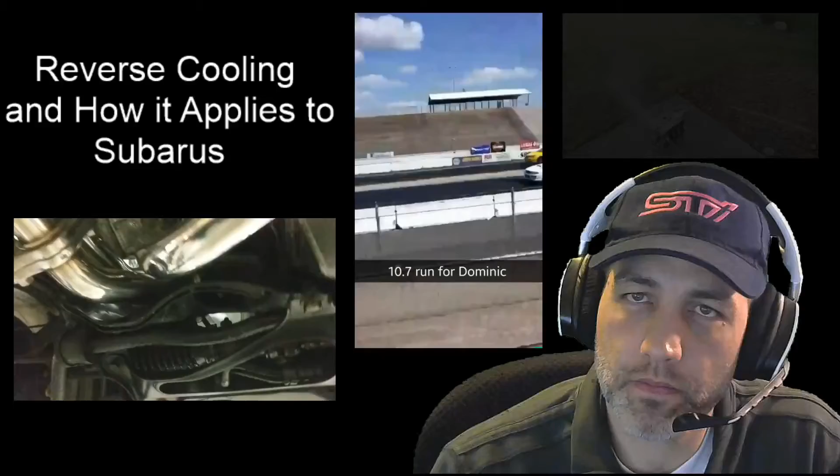This one is going to be a little more advanced in concept, not in mathematics, but in concept. I want to talk about cooling systems, more specifically what we're doing with a cooling system in a car, and what is reversed cooling.

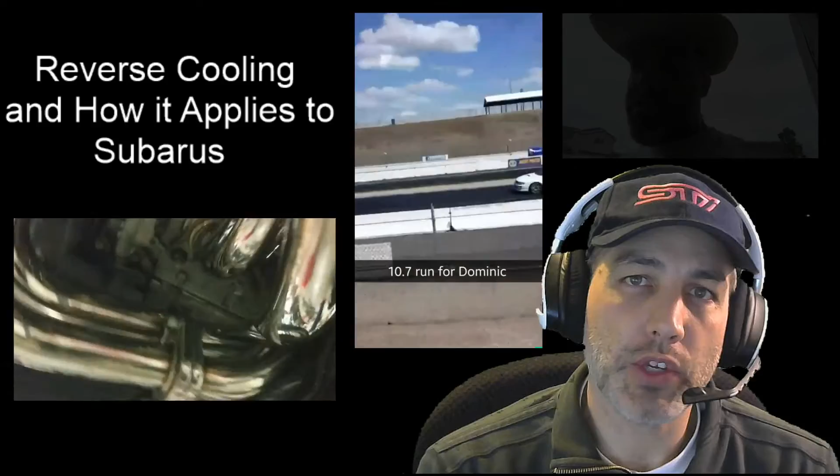Some of us are old enough to remember the small block Chevy and how it was the staple, or still technically could be called the staple, of classic car high performance. It's the universal power plant that a lot of people put in everything. It's a decent platform, you can do a lot with it, but it has a lot of limitations.

After the small block Chevy came the LT1 series. They had realized and learned some things, and they were able to make some significant gains in power density and ease of making power on it. But it didn't really get as popular, I think, as it probably deserved to be, due to the complexities of the fuel injection systems that also came out at the same time with the LT1.

The 80s and 90s, late 80s, early 90s, was when electronic fuel injection was really starting to take off. However, it was really complicated, due to limitations in the solid state circuitry, solenoids, actuators, and that kind of thing. A lot of stuff was done with vacuum lines and diaphragms, so these cars had just nests of hoses under the bonnet, hose after hose after hose, and lots of extraneous systems to try and tackle certain tasks.

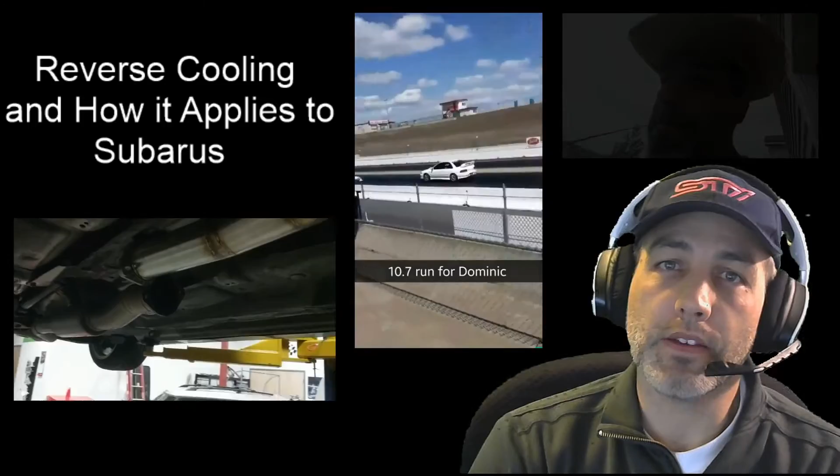Whereas now, modern fuel injection, especially on the Subaru, is quite simple. There's not nearly as many hoses. There's some wires, but overall the systems are very streamlined and efficient at operating.

Later on came the LS, and they did some more stuff. Theory is they copied some Ford parts, the head design and things like that, is something I hear a lot of. But overall, the LS makes way more power than a small block Chevy does, and it gains more power for the same modification than a small block Chevy would. But it really all started with the LT.

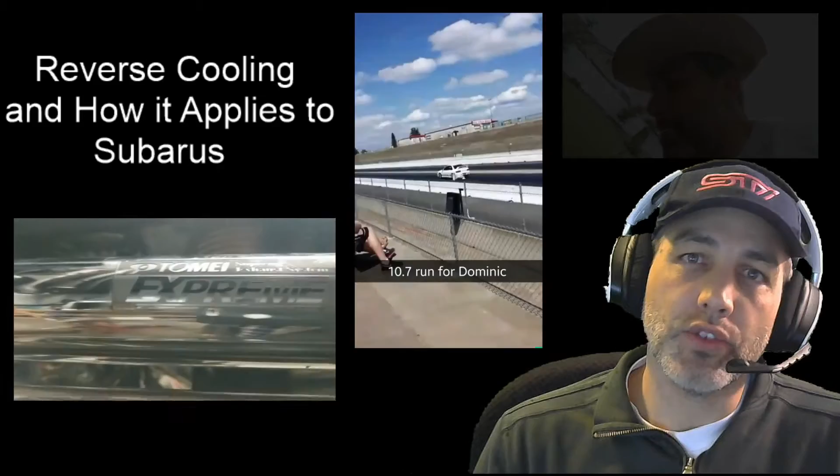So what was one of those things that they figured out? One of those is cooling, known as reverse cooling. I don't know why they call it reverse, but I know they call it reverse. They call it reverse because originally the cooling systems would pump water into the cylinder block to pull heat from the cylinders, and then the coolant would flow up through the head and get distributed there. That was conventional cooling.

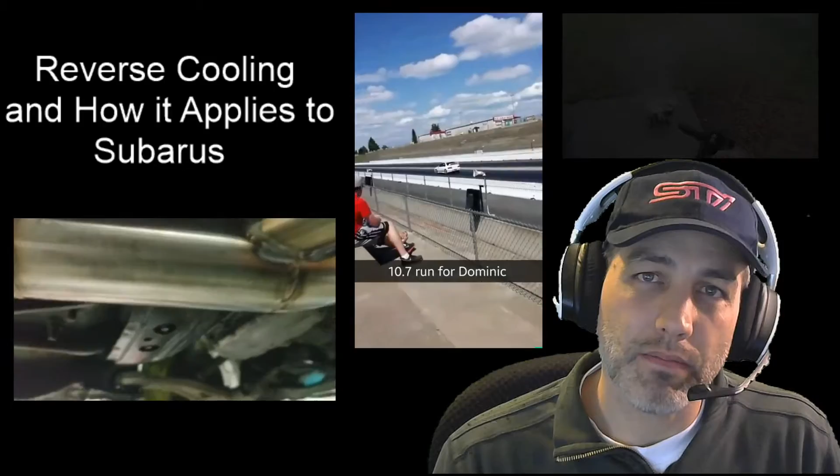When they realized, if we cool the heads first and keep them cooler, then we can get more power, we can run higher compression ratios, we have less knock tendencies, all this stuff happens that's really advantageous for us. So they called it reverse cooling, because now it was going from the heads to the block. So why did that work? What about that worked? I'm going to share with you a few things that talk about how that works and why that works.

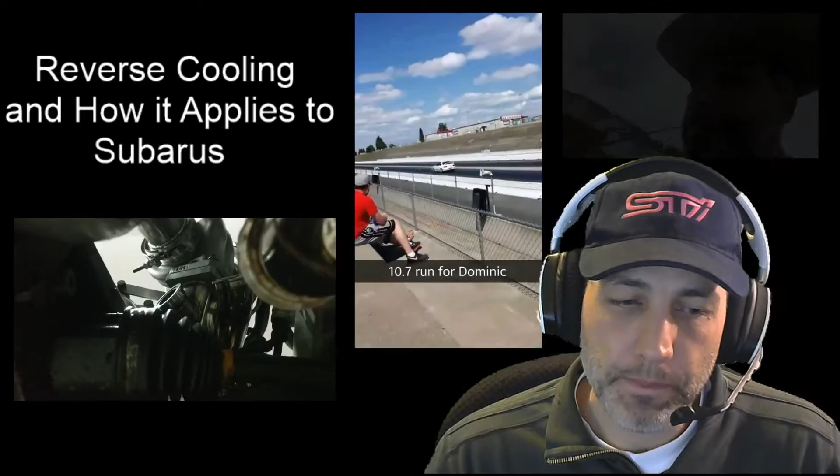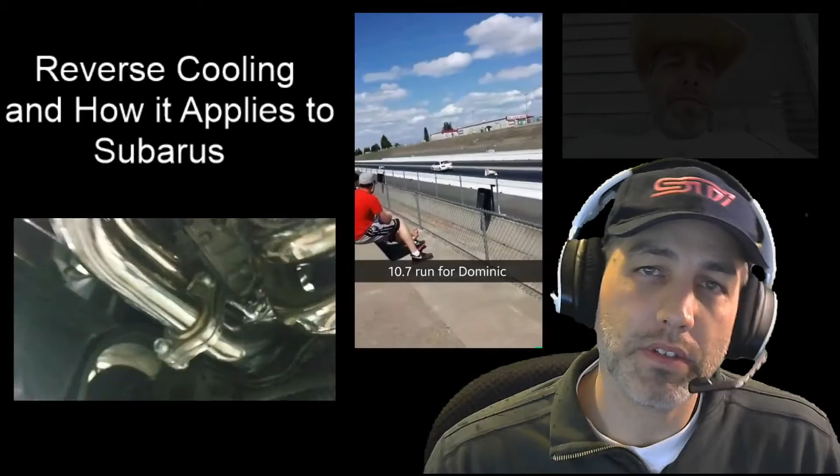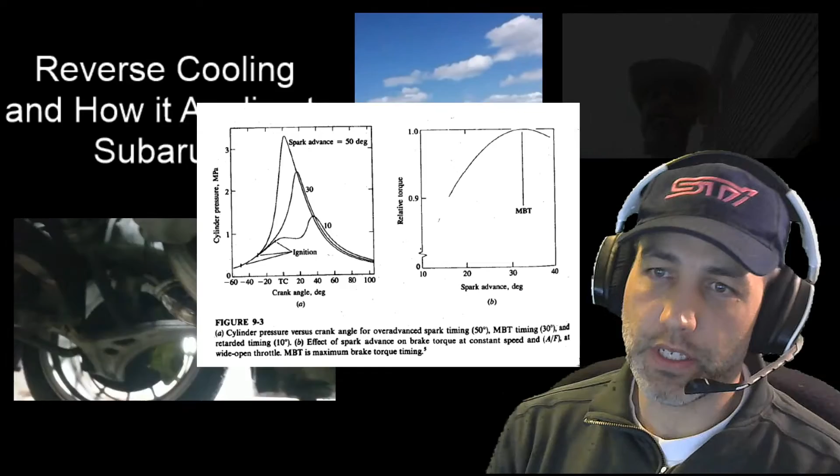If you look at that graph I posted, a 50-degree advance has peak pressure at top dead center, and that's actually bad in that situation. That's too much pressure at the top, and you're not gaining anything by doing so. At the 30-degree mark, that is the correct ignition advance for this engine, and you'll see that the cylinder pressure peaks around 20 degrees after top dead center. You'll also notice the 50 degree has more peak pressure, but if you look at the graph to the right, you'll see that the torque actually does not go up with that.

It's just you're wasting energy and you're adding heat, and heat is the thing that we're really concerned about at this point, right? We're talking about pulling heat out of the engine. So how much heat is there in the engine, and where is it concentrated the most? Well, it's concentrated the most in the combustion chamber.

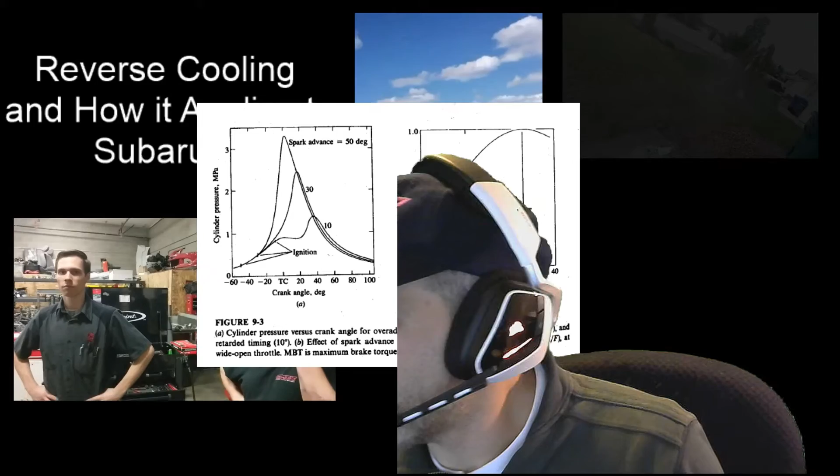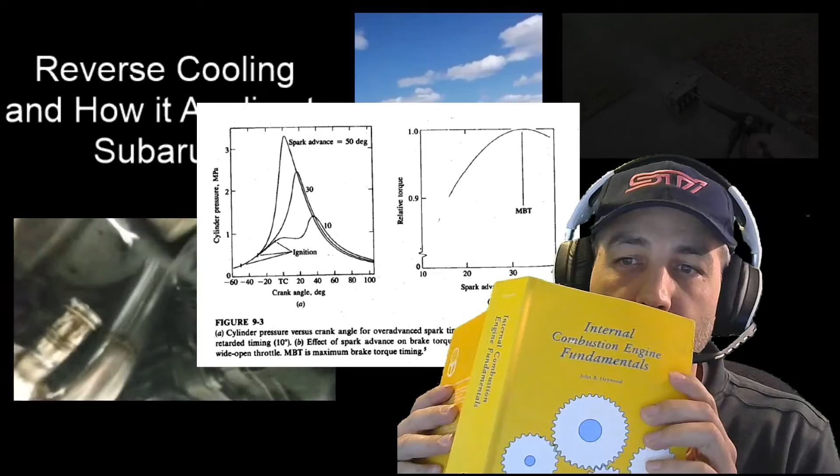I don't have modern equipment to prove that to you, but I do have some entries out of this book here, Internal Combustion Engine Fundamentals by John B. Heywood. And I have this graph here, and reading this and putting that graph together, we can figure out together where all the heat is.

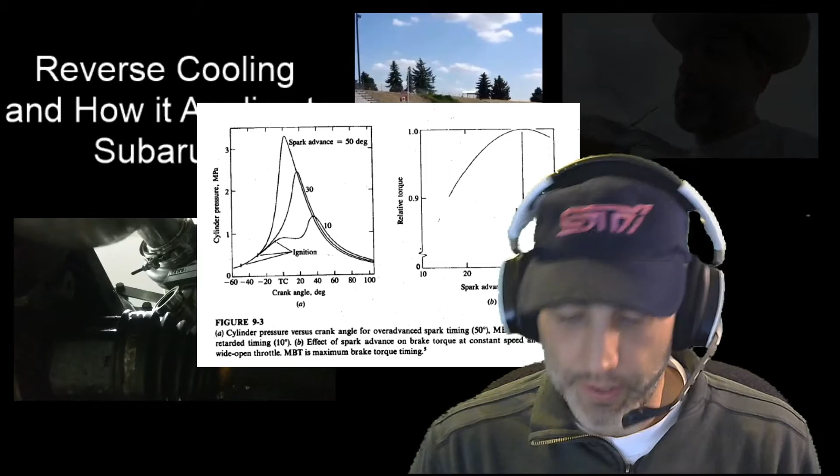This section is actually about combustion chamber temperature. It says that the surface area of the combustion chamber varies through the cycle. The heat flux into the containing walls changes continuously.

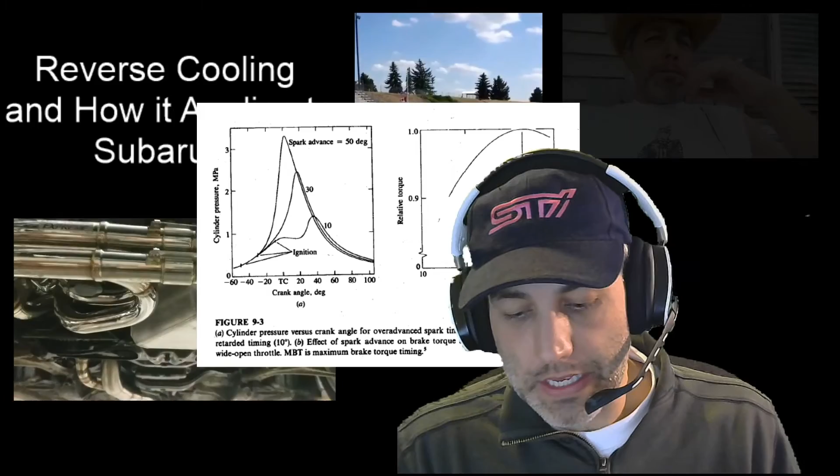From a small negative value during the intake process. So what they're saying here is they're calling, in this case, the combustion chamber's entire volume at this point is what they're calling it. So during the intake process, the piston is moving downward, and so the heat flux is actually reversed. It's actually cooling at this point, which is expected, right? You expect that when the intake air comes in, it's going to cool whatever's in there.

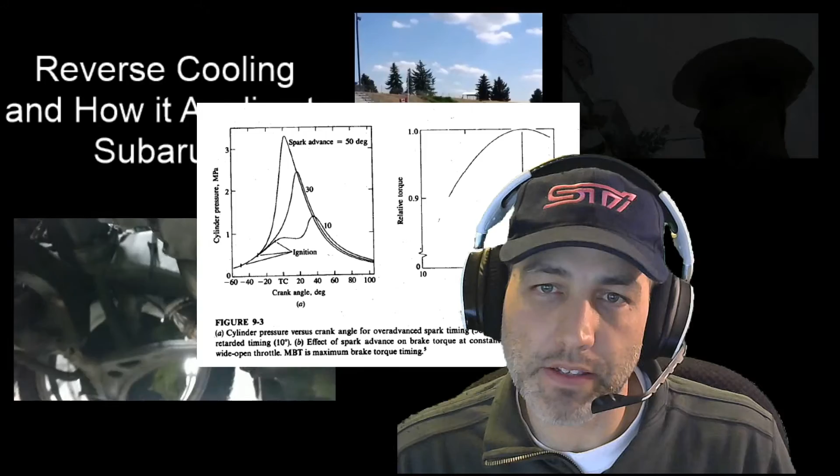So it says the heat flux into the containing walls change from a small negative value during the intake process to a positive value of order several megawatts per square meter early in the expansion process. Well, if we look at our graph, we can see where early in the expansion process is, knowing that our ignition event is at 30, and we can see that expansion starts to move up after that.

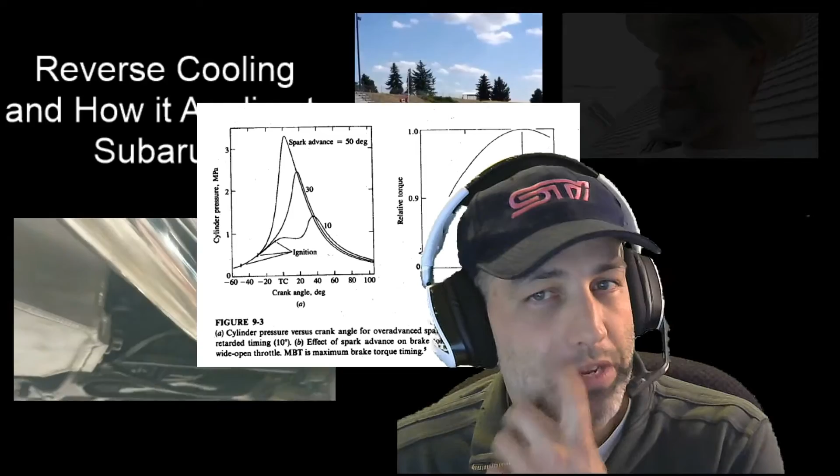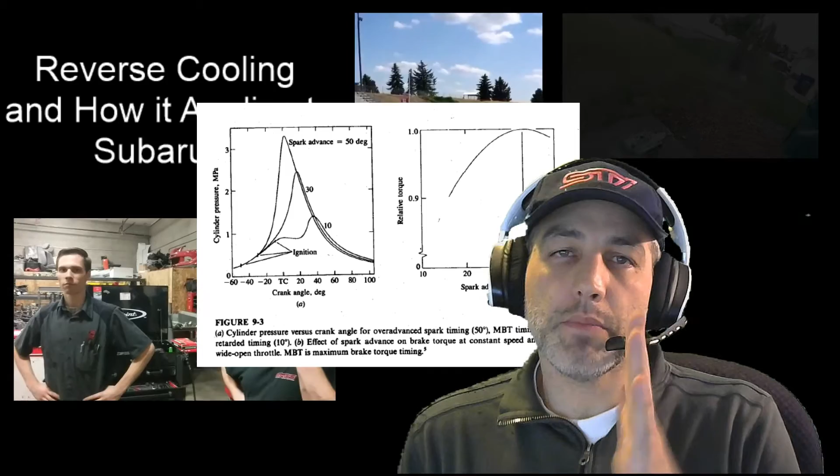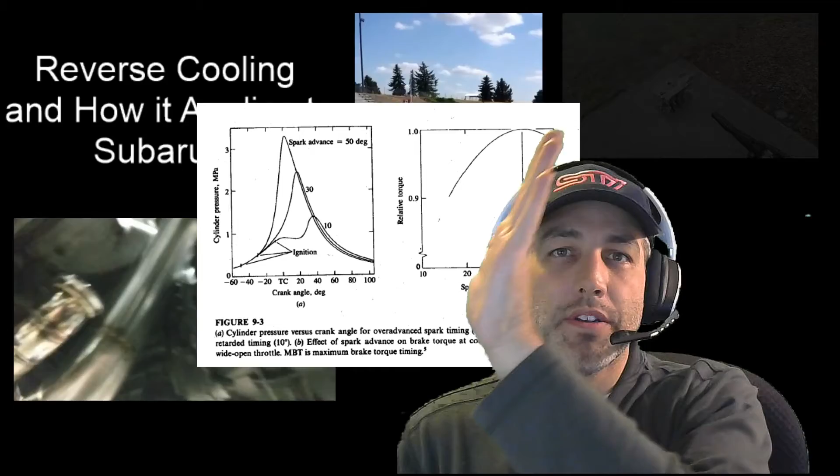Now, how early is it? I don't know how early they're talking, but if you were to look at the piston location at 30 degrees before top dead center versus 20 after, the piston does not move much. As the piston is approaching top dead center and the rod swings over the top, right, there's a lot of degrees of crankshaft rotation with hardly any movement at the top of the rod, which means the piston is hardly getting much closer.

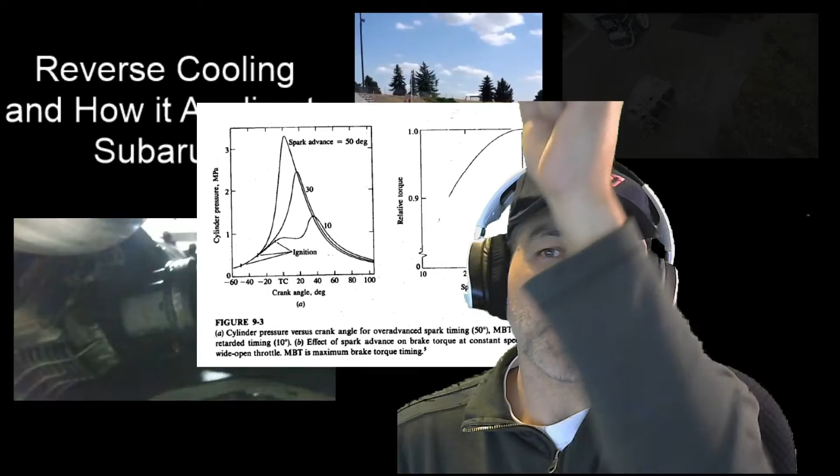So the piston goes really fast through 90 degrees, and then it slows down, it goes through top dead center, and then it comes back down again. I'm going out of screen on my camera there, sorry about that, but I think you can get the idea.

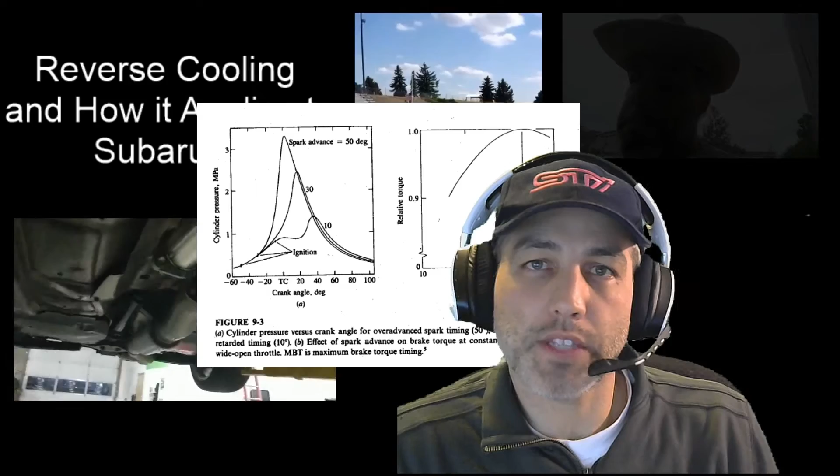So what that's telling us is that the majority of the heat, or at least the highest rate of heat transfer into the engine during the combustion process, is early, and that means that's when the piston's at the top. So where is the majority of the heat going to be? Well, it's going to be when the piston's at the top. Most of the combustion happens when the piston is at the top. Most of the energy formed happens when the piston is near the top. So anywhere from 20 before to 20 after, we'll just generalize that in this case. Well, it's all at the top.

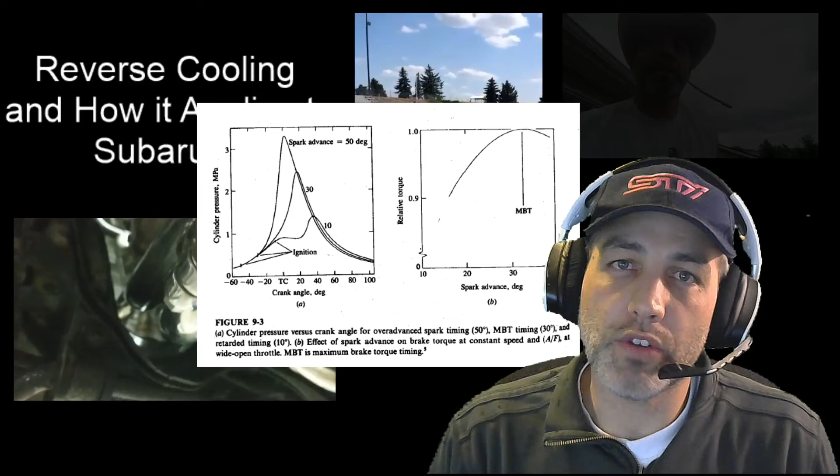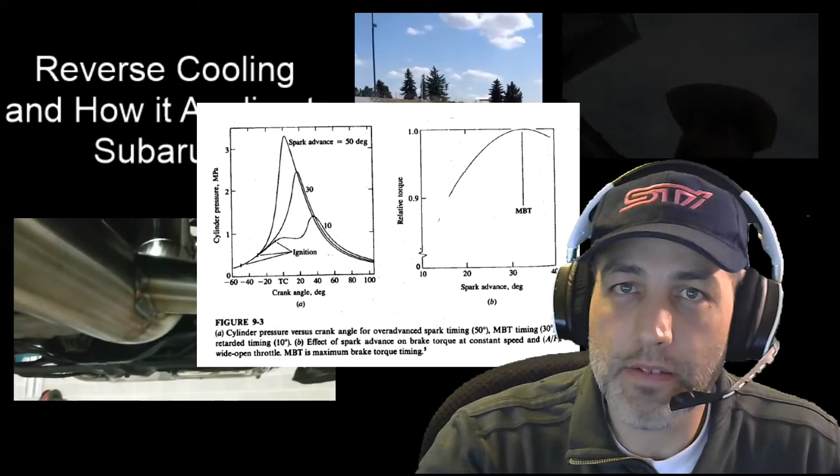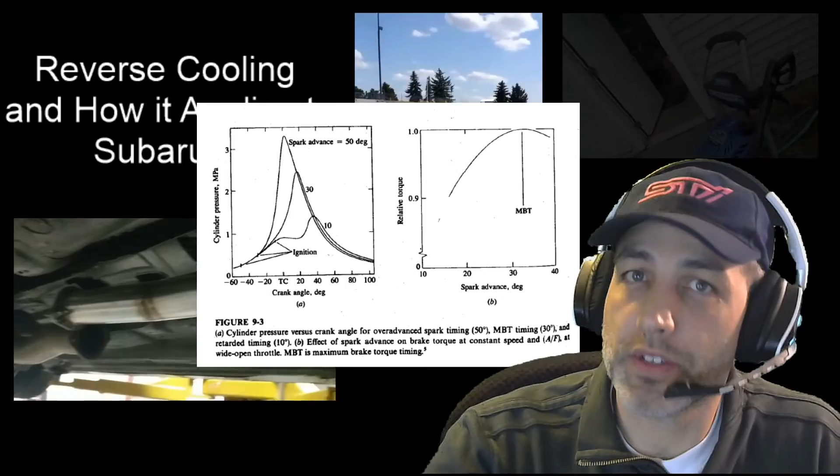So what does that mean? That means that if we need to remove the heat from the head, put some priority on that, then we can reduce combustion chamber temperatures, and we can reduce our knock tendencies and things like that. Now, why am I bringing that up? Well, I'm bringing that up because the EJ has a tendency to break the number 4 piston. Some of that is by design from Subaru as far as the programming is concerned, and some of that is just because of the mechanical system itself.

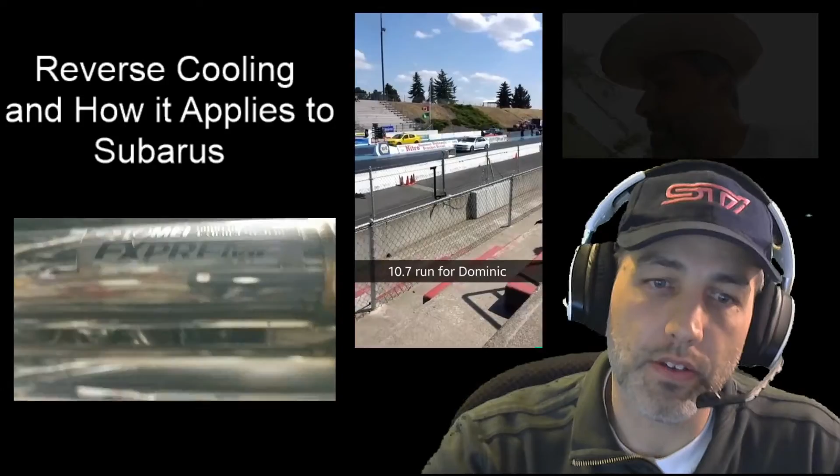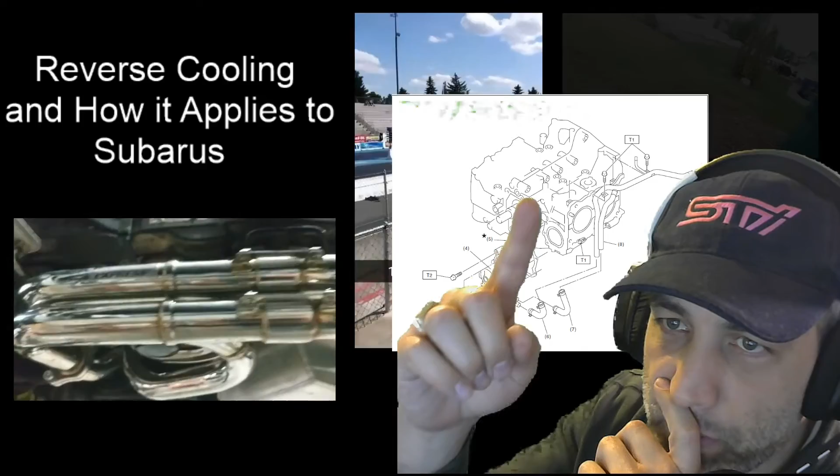So in the EJ, the knock sensor is really close to cylinder 4, but it's in that picture. Well, it's not in that picture, but next to bolt T1 there. Let's see if I can point to it. Right, that little bung area, that's where the knock sensor sits, okay? Cylinder 4 is right there, cylinder 2 is right there. So the knock sensor sits really close to cylinder 4. That means the knock sensor hears cylinder 4 better than anything else.

Cylinder 3, cylinder 2, and cylinder 1 are really far from that sensor. Not only are they far, but the block is split, with silicone between the two halves. How well does sound transfer through a solid material? Pretty well, it conducts very well. But if you split that material and put it together, you lose some of that transfer, a significant amount. Then add silicone between those two halves, and you're going to hear a lot less. Are you still going to carry sound? Sure, you're absolutely going to hear it.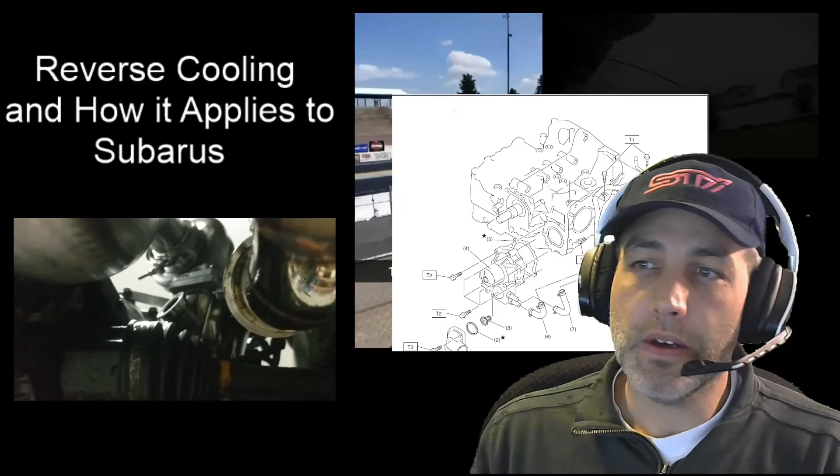In addition, the valve train for cylinder 4 is really close to that sensor, closer than the combustion in cylinder 3, and especially closer than the combustion in cylinders 1 and 2. When you're listening for a knock event, which usually happens around 20 degrees after top dead center, near peak pressure, you're also having valve events happen on other cylinders. If you look at some cam profiles, some cams don't close the exhaust valve until 20 degrees after or so. And if you have exhaust AVCS and you retard the exhaust cam, you push the closing point past top dead center, so you end up with valve events at the same time you could be having knock events.

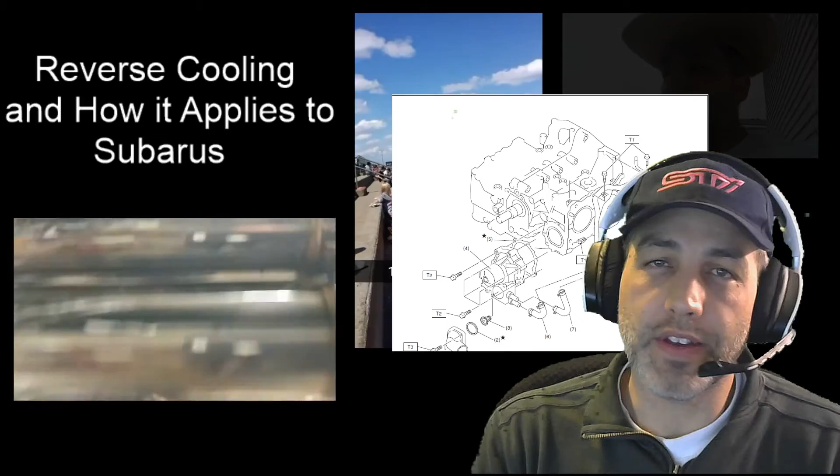Subaru realized they were having issues hearing all 4 cylinders and not being able to filter out the valve events from other cylinders, since those noises are closer to the sensor than the combustion in the other chambers. In the FA engine, you can see they addressed it by adding a second knock sensor, one on each case half, placing them closer to the cylinders than to the heads. So they addressed that issue with that.

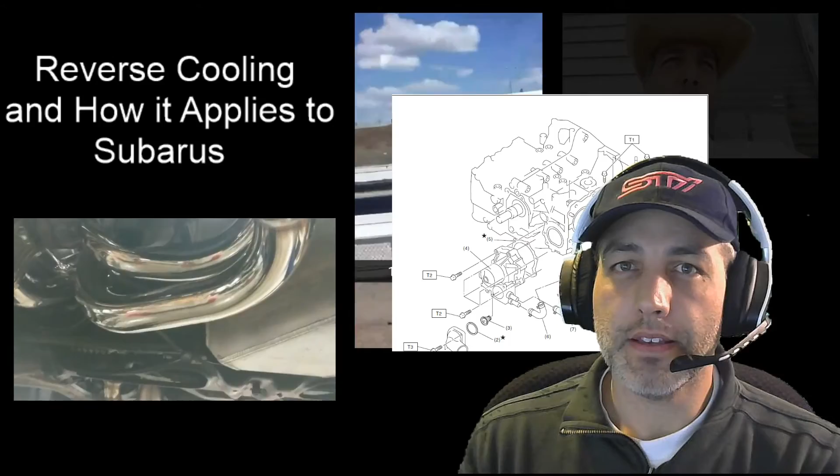So what did they do with the EJ though? They still stuck us with one sensor, never added a second one. Instead, they said, okay, we can hear cylinder 4. And we know that if we make cylinder 4 the most aggressive cylinder, throwing extra timing at it and pulling fuel out of it, and keep it knock free, then the other cylinders would have to be knock free too, since they're not nearly as aggressive. That's exactly what they did. Look at any of their calibrations and you'll see cylinder 4 has more timing, or the others have less, based on what's positive in cylinder 4 versus negative in 1, 3, and 2. The fueling is similar too, typically cylinder 4 has less fuel as well.

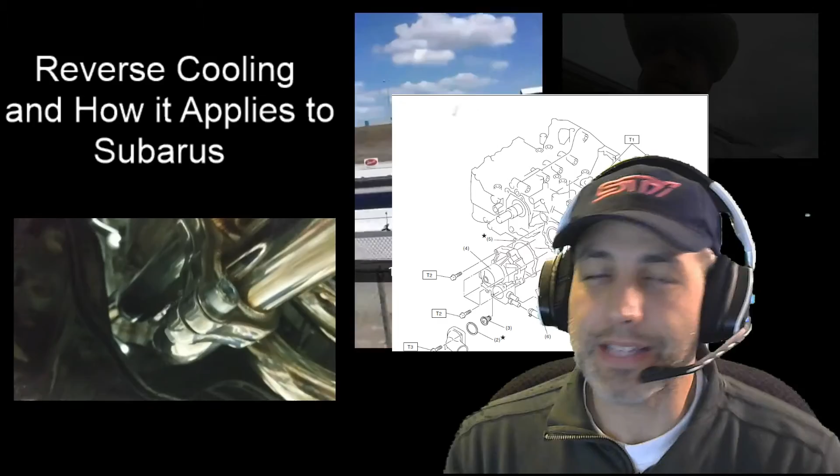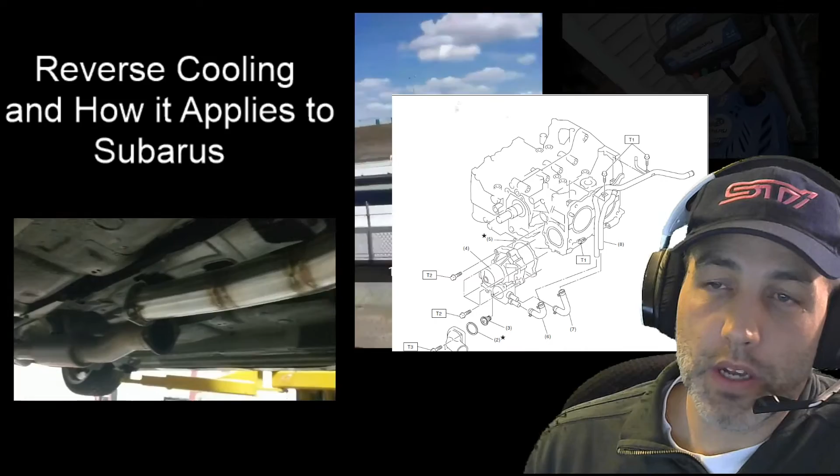There's another thing that occurred to me when I was taking the engine apart: cylinder 4 also has less cooling, the head has less cooling. If you look at the picture behind me, you'll see the water pump bolts to the front of the block itself. It's near the head, but it bolts to the block, and it discharges water through the crossover to the side, but also through the block case itself, and then into the head.

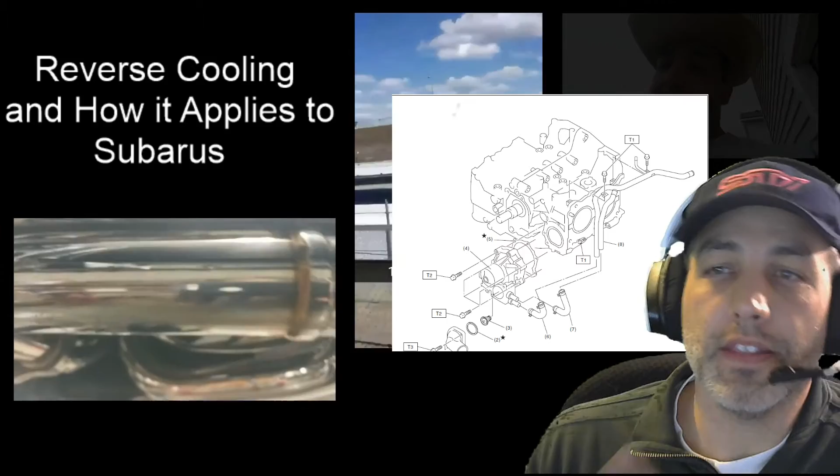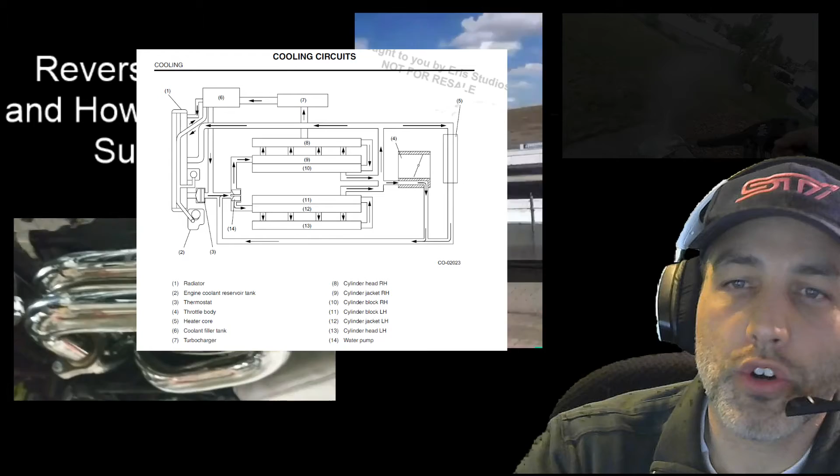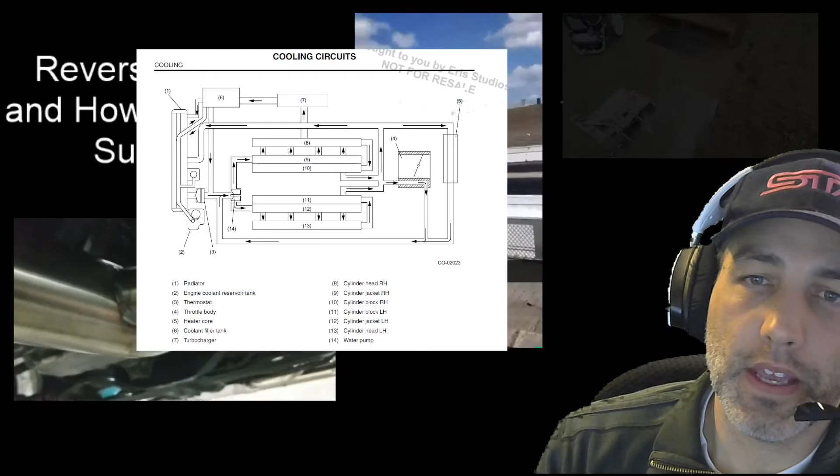Subaru shows a coolant flow path diagram, let me bring this up. Number 14 is the water pump, on the left side there. It flows into 12, which is the block, then shows 12 to 13 to the head. There are 4 ports showing the head, which are just the holes drilled in the deck of the head gasket and the head. The deck is actually mostly open on these nowadays anyway. So it moves through those ports in the head, and then shows this little crossover tube over there.

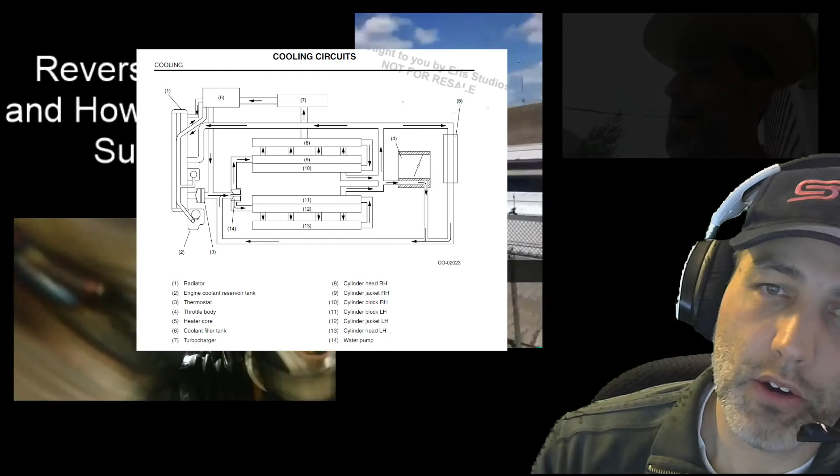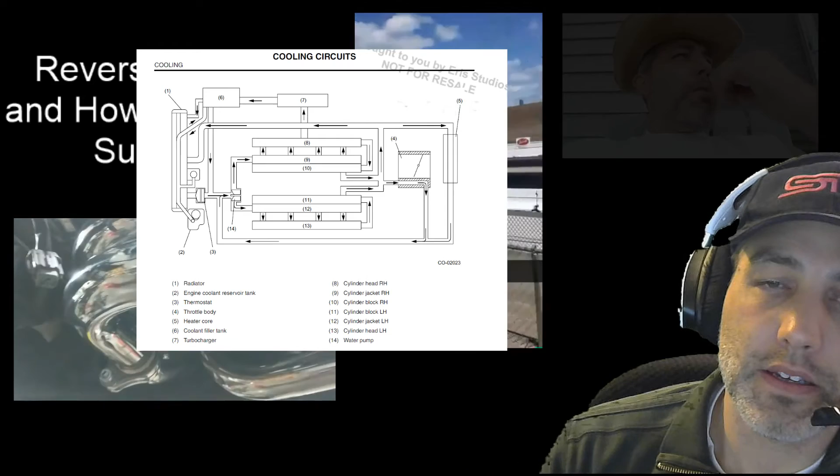Well, there really isn't a crossover tube. If you look at the cooling system on this thing, there really isn't a crossover tube, and it shows this little flow path here. It's a little weak, and the flow path kind of bypasses the exhaust side of cylinder 4. And if you look at a cylinder 4 piston that has failed from knock, you see that almost every time the part that breaks is the exhaust side of the piston on cylinder 4.

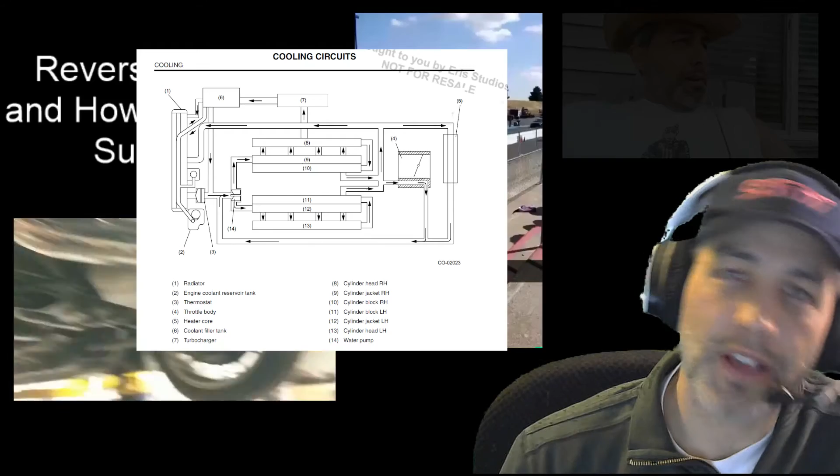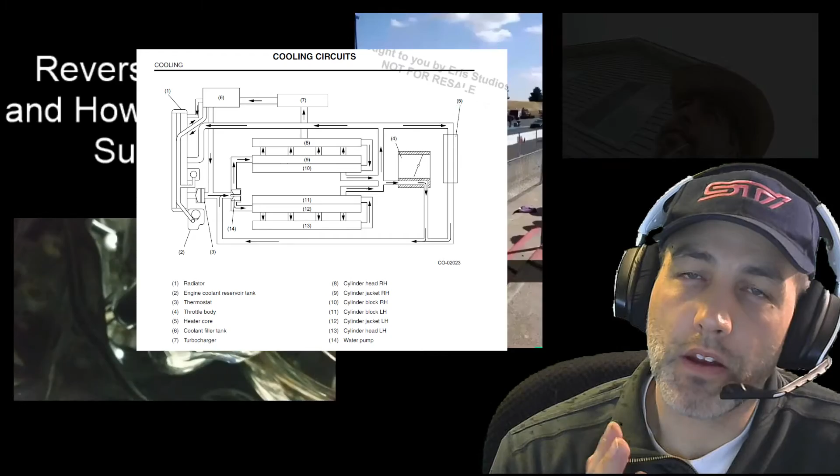So when I look at this, I say, it seems to me that not only is cylinder 4 the most aggressive in tuning, but it's also most aggressive in lack of cooling.

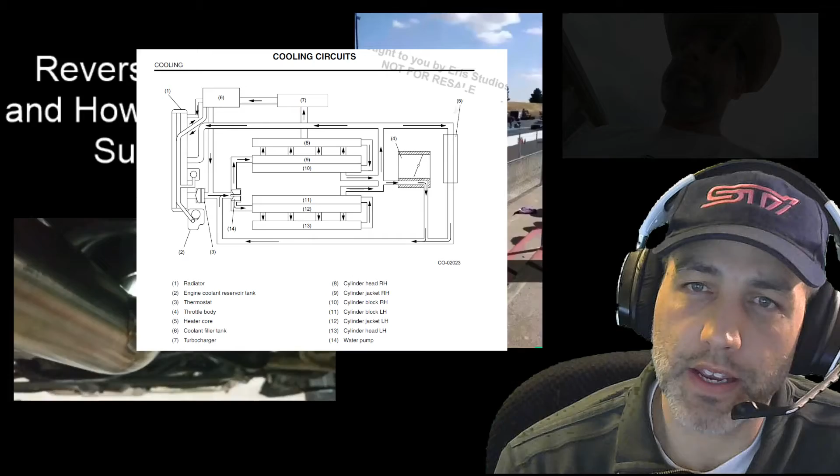If you look at that picture some more, you'll see the passenger side head, or right-hand side head. It goes from number 9, which is the block, to 8, which is the head, and then to 7, which is the turbo. And the turbo is fed out of the head. Then it goes through the turbo, the reservoir, and back to the inlet of the pump again. So the passenger side head has a flow path that promotes flow through the head to the end of the water pump. But cylinder 4 doesn't have that.

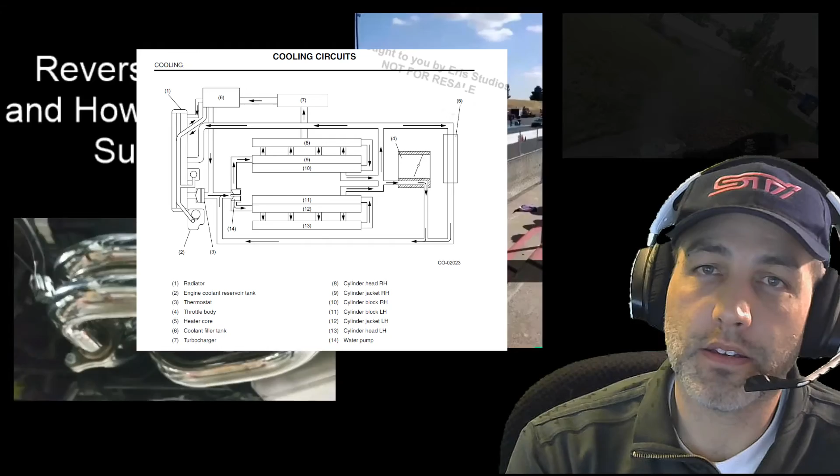Now the twin turbo Subarus do. They have a coolant line that comes out of the head and feeds the turbo, and then goes to the crossover tank and that kind of stuff. So there's a forced flow path on the driver's side head, and that helps to aid in cooling.

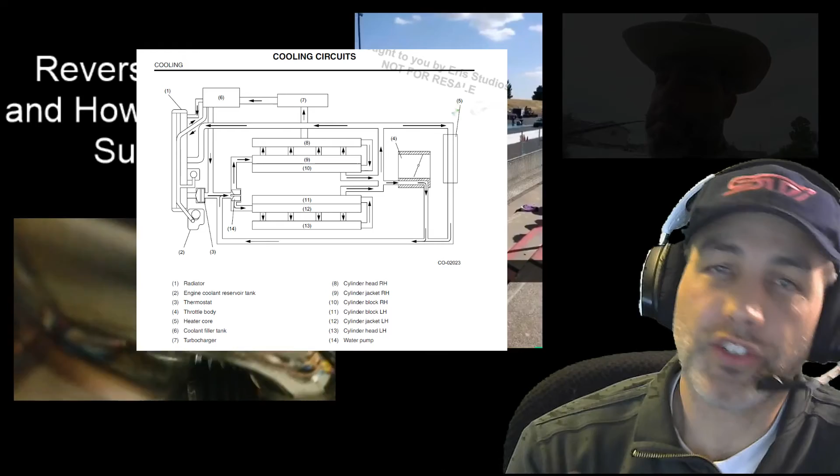So my newest product that I have produced is addressing that exact issue. My goal is to increase the flow around cylinder 4, the passenger side, the driver's side head, and by doing so, make it not so aggressive on cooling. I want to bring it down. I want to reduce the knock tendency of cylinder 4. And if I can increase the cooling to cylinder 4, I believe that I can do that.

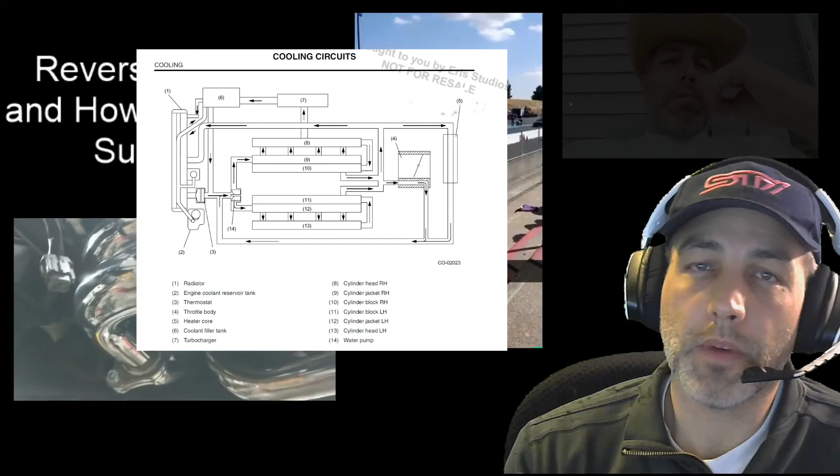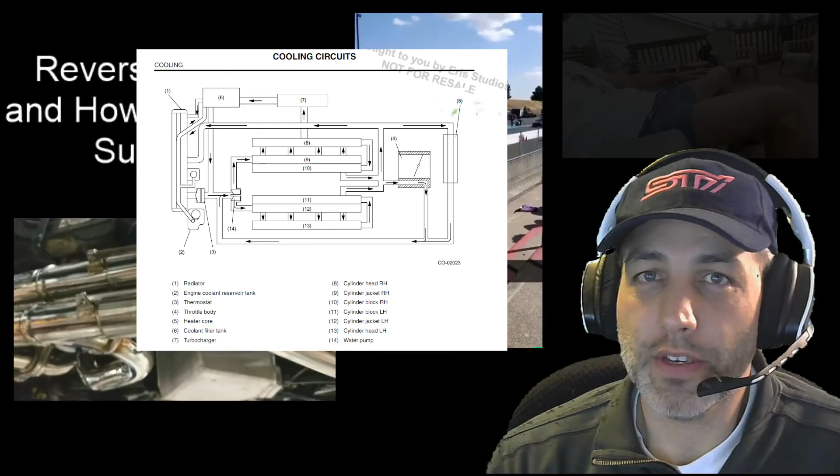I've already proved that I can get more cooling to it. Now I need to somehow quantify the power output, right? And that's going to be really hard to do. Like some mods, you just got to kind of go, well, I can see that that's supposed to work, and then go for it.

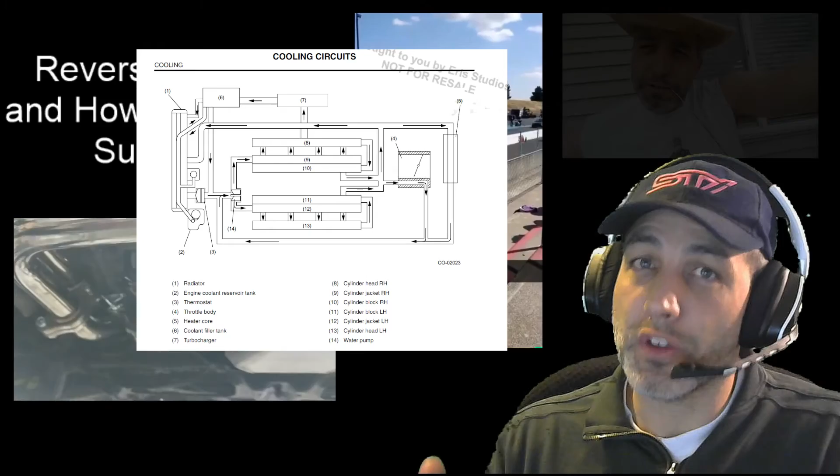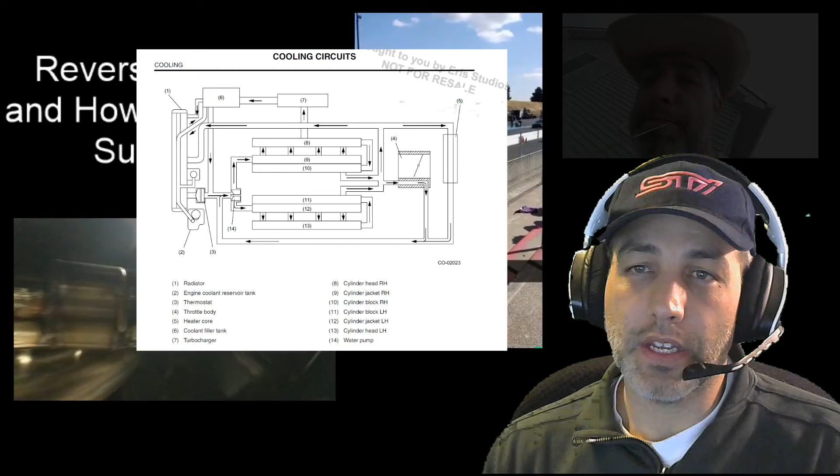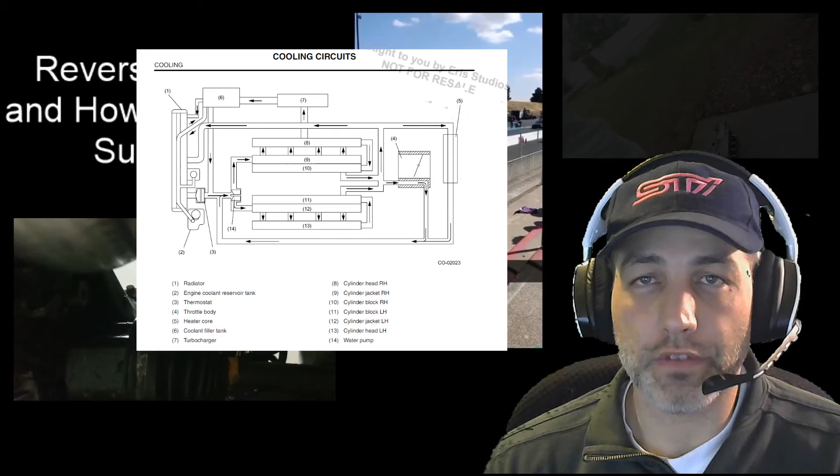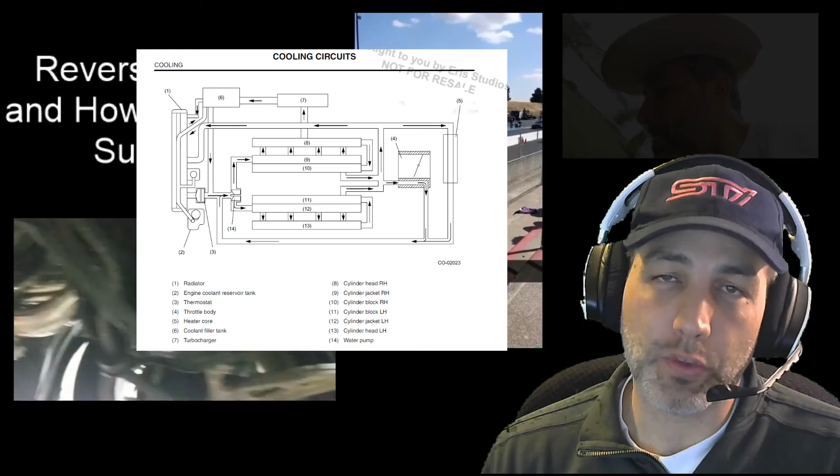So I have been working on this for quite some time. I'm excited to reveal what it is and how it works to everybody. Just wanted to make a video, talk about reverse cooling a little bit, the cooling systems a little bit, and then as to why it is my newest product improves the cooling of cylinder 4. I may even be doing some internal work or a specialized head gasket to help promote flow to cylinder 4, or at least to change the order in which the cylinders are fed, to help get better cooling balance. But I have some more RTDs to install and other things to work out to figure that part out. The initial products come out in just a few weeks.

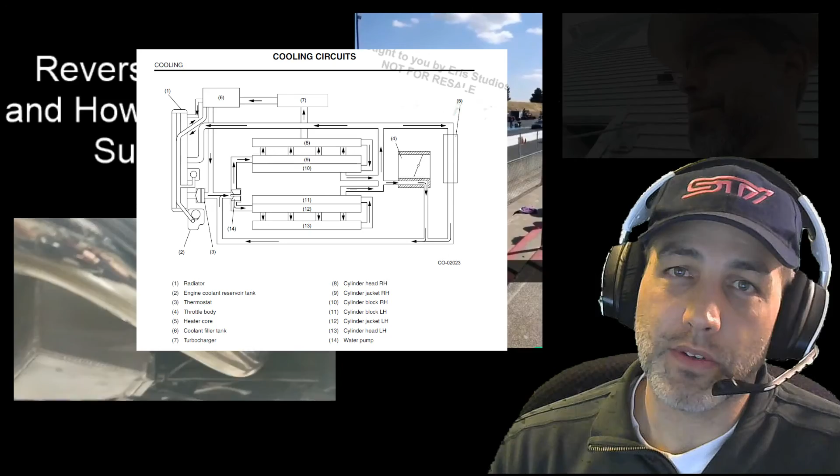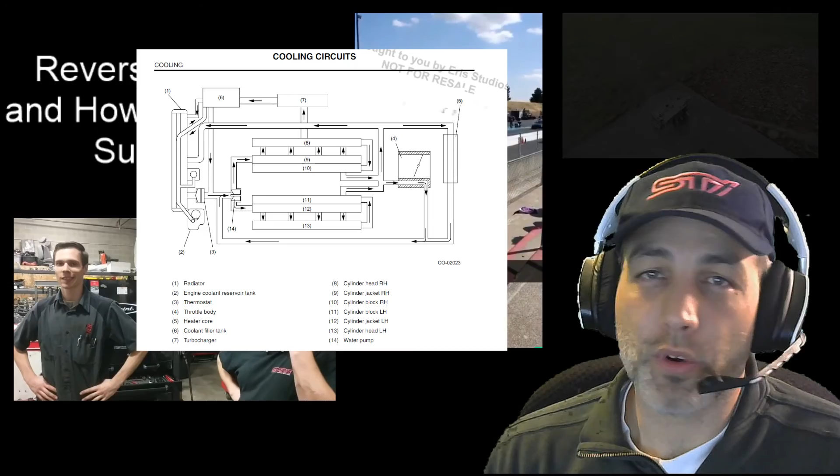I look forward to hitting the market. I know it's going to help, and I am just happy to be able to bring something new to the market that addresses a problem that some people didn't realize existed, but it's something that I've been trying to really work on for quite some time. So I'm really excited, and I hope you guys are too.